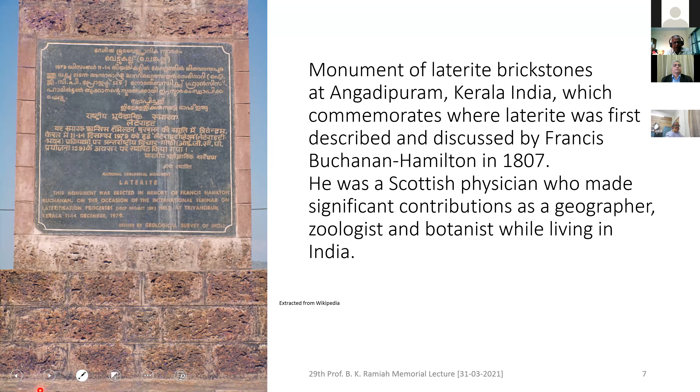In 1979, there was a geological congress, and at that time this monument was erected in his honor.

This monument is on laterites. The laterites, as I said, are available in most parts of coastal areas.

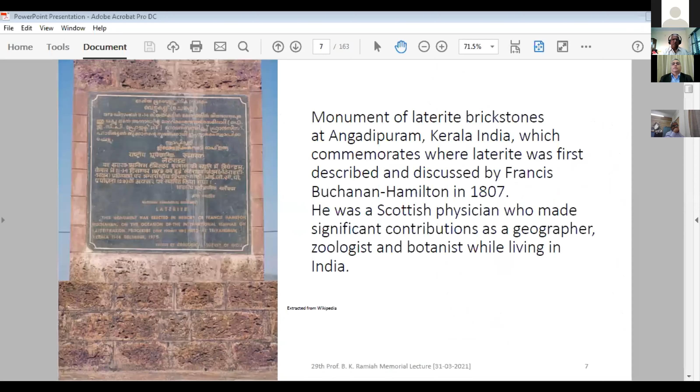So laterites are... this is the monument that was built in his honor, Mr. Buchanan. Next one, please.

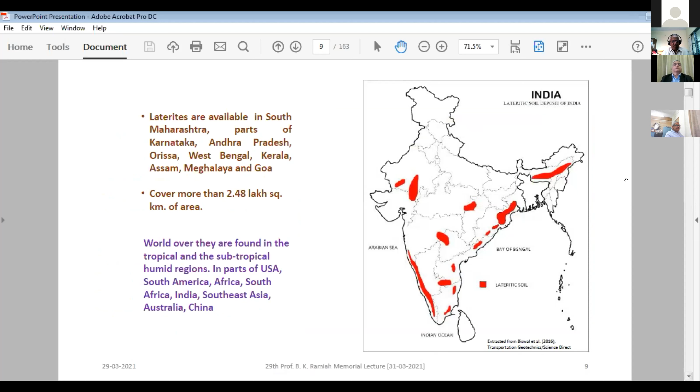Laterites, can you make it bigger? Their properties depend upon the climate.

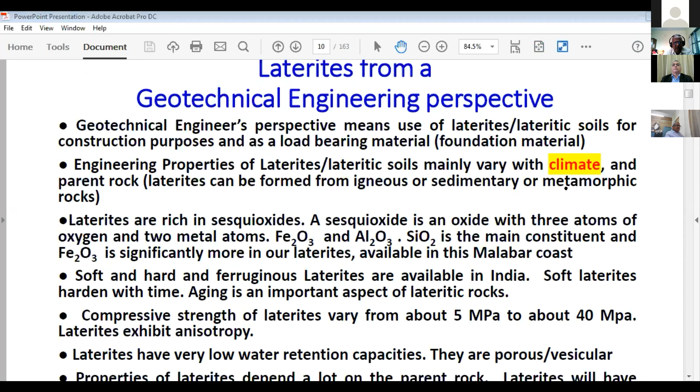There seems to be some problem with the net at my side, perhaps. So it depends on the climate and the parent rock, and they are available from soft to hard, and the strength varies from 5 to 40 megapascals. And although we get plenty of rainfall in this area, about 4,000 millimeters of rainfall.

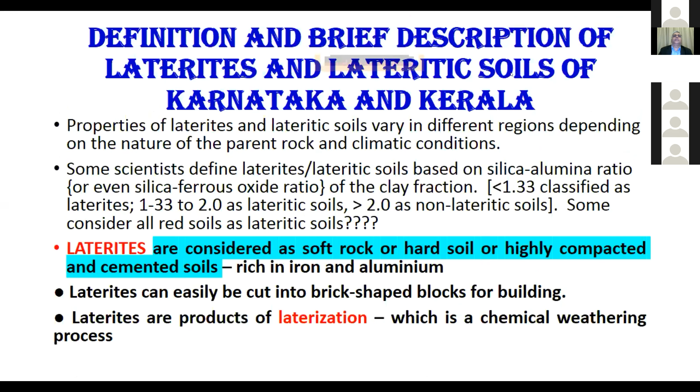Laterites are spread out all over the coastal areas, east and west coast, and some parts of northeast India.

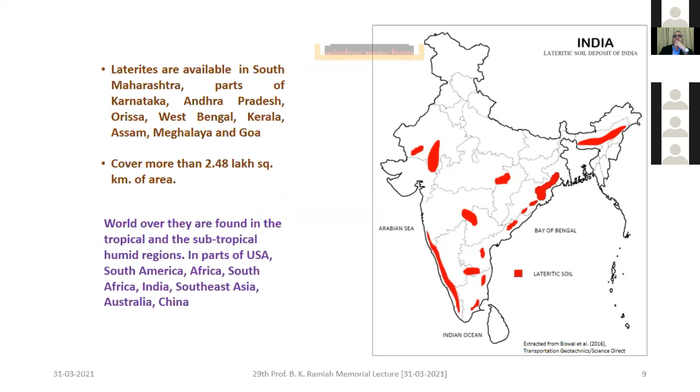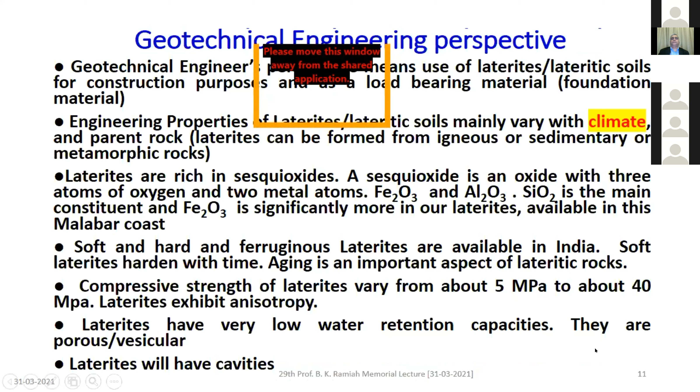Although this area receives very heavy rainfall, we still have a water problem because this laterite doesn't have water retention. It's very porous and vesicular, and it has a lot of cavities. You will see some cavities in lateritic soils, and in this area there are lots of cave temples in laterites.

I would like to talk a little bit about the geology of the area and the climate. The climate here has only two seasons, rainy and summer, and there is no winter. This is very conducive for the formation of laterites. This area doesn't have much clay, unlike other countries.

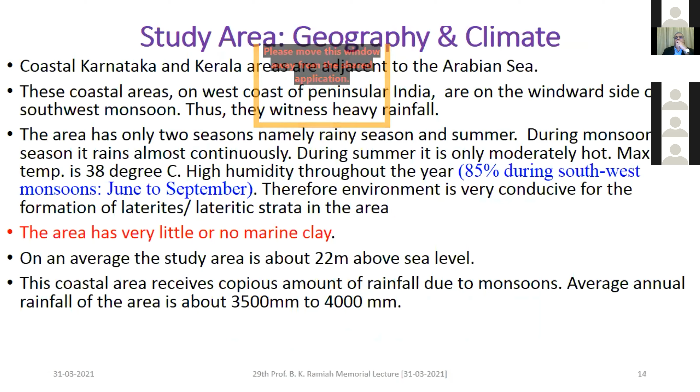We know the tectonic movements. This was one piece of land, the Gondwana land of Pangea. We know there were tectonic movements, and this is the present day. The Indian plate is moving towards the Asian plate, and in the process the Himalayas is formed.

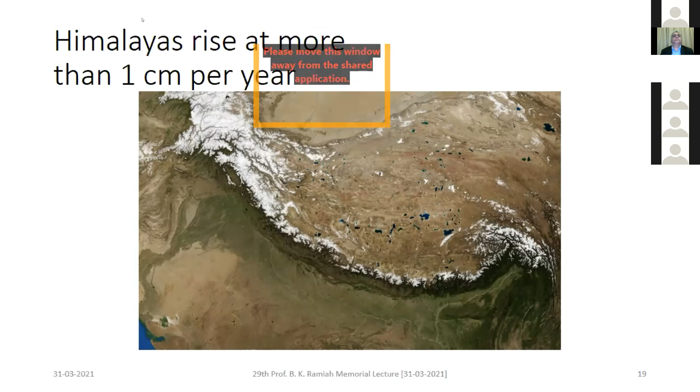So there is this Indian plateau. The plateau is also rising. Although we have sea level rise, the land rise due to tectonic movements is more, and so we don't have any sea level rise, although there is sea level rise of 1 centimeter per year due to global warming.

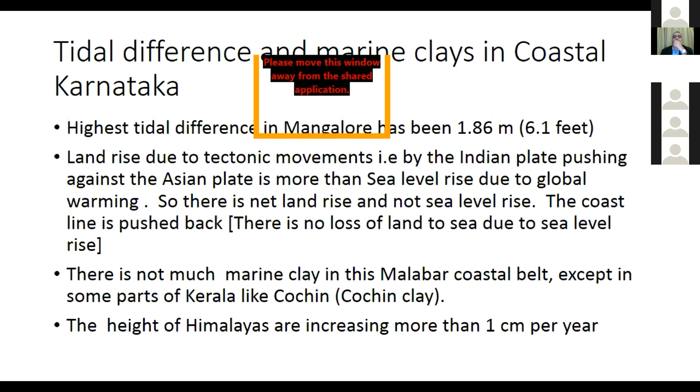We were doing some geotechnical investigations in the central part of Mangalore, and we found at 15 meters depth this core sample which had a lot of pebbles, other fossils, and peaty matter, which indicates that this land was under the sea sometime, and now the sea has moved away.

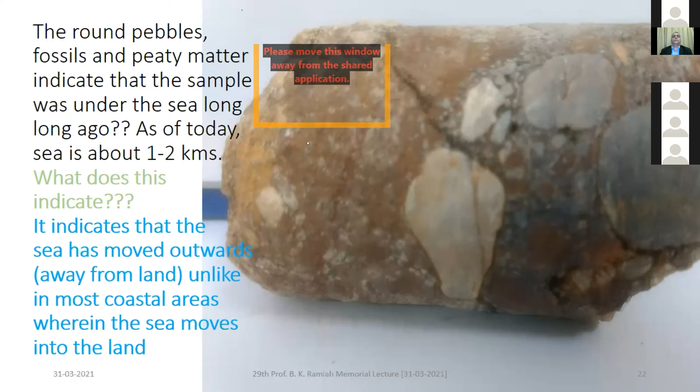This shows that although there is sea level rise, the land rise is more due to tectonic movements, and so we call our Malabar coast as the coastline of emergence, whereas in the northern Konkan coast there is a net sea level rise. So all this has a conducive geological situation for formation of laterites.

As I was telling, if there is more lithomarge, then we call it lateritic lithomarge, and while scooping, if we have more laterite, we call it lithomargic laterite. So both of these are lateritic soils, including lithomargic clay and crushed laterite.

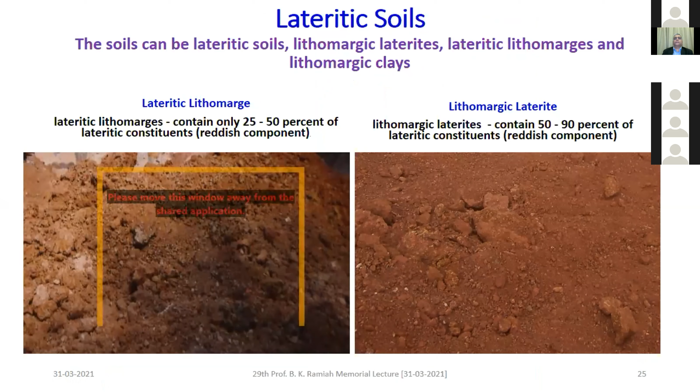Laterization is a chemical weathering process in which the silica is removed, and this laterite, as I said, is used for construction purpose. The laterites are used for embankments and low-lying areas.

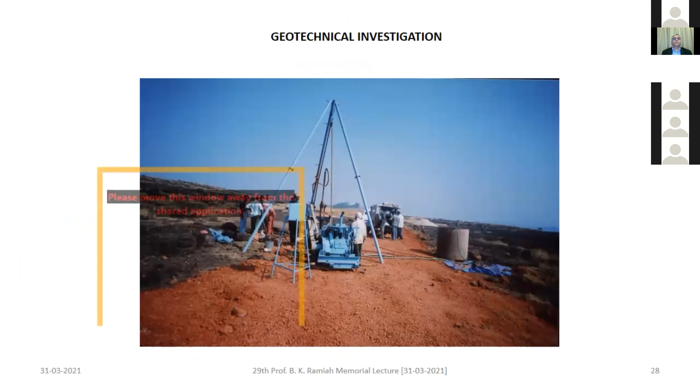It's very important to do a thorough geotechnical investigation. This is a scene of the Mangalore airport, where the Mangalore airport was built.

In one of our geotechnical investigations, the laborer was hitting the bottom of the excavation with a pickaxe, and he heard a hollow sound. When the engineer got suspicious, he asked them to dig out more, and they found that right underneath one of the columns already constructed, there was a huge hollow cavity there. So a thorough geotechnical investigation is very important in lateritic formations.

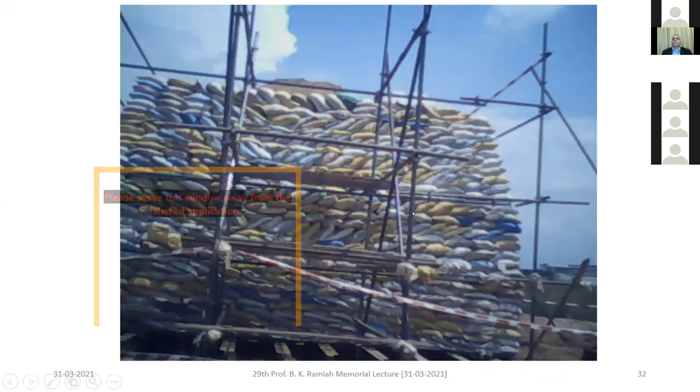So we do some load tests.

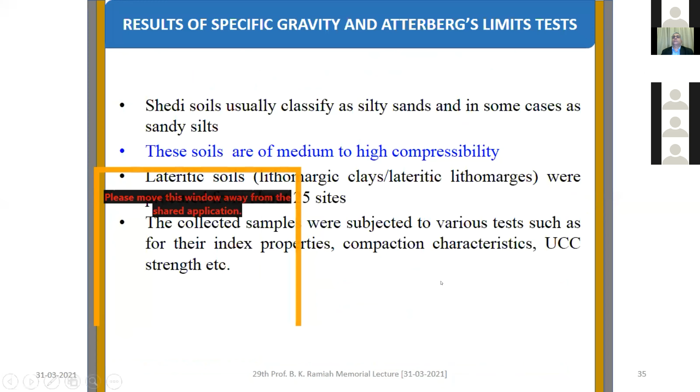So we did a number of tests on lateritic soils from about 15 sites, and the data I have compiled. Of course, there are many more. You can skip the next 2-3 slides, the tabular columns.

So in summary, the lateritic soils are medium compressible. They have a plasticity index of about 10 to 25, and a cohesion of about 20 to 30 kPa and friction angle of 10 to 20 degrees. But the most important thing is that these soils are problematic soils. They behave like dispersive soils and have a high erosion potential.

So the chemical composition is this. The laterites have a lot of silica and iron oxide, and the leached out lithomargic clay - the silica has been leached out. So the lithomargic clay has about 76% silica and a lot of alumina.

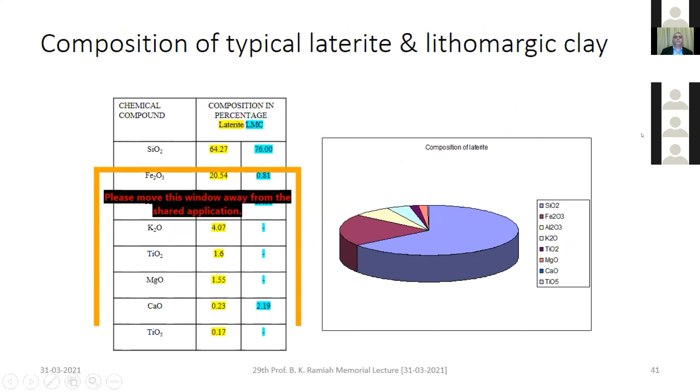So we did some UU triaxial shear tests and tried to find out the shear parameters with moisture. The shear strength parameters are very sensitive to moisture variation, so at high moisture contents, the C and phi values are very low.

We also did some plate load tests, laboratory scale plate load tests, and it is seen that the fully saturated or submerged soil has very low strength. So it's very important to control the moisture content and also give confinement to the lateritic soils.

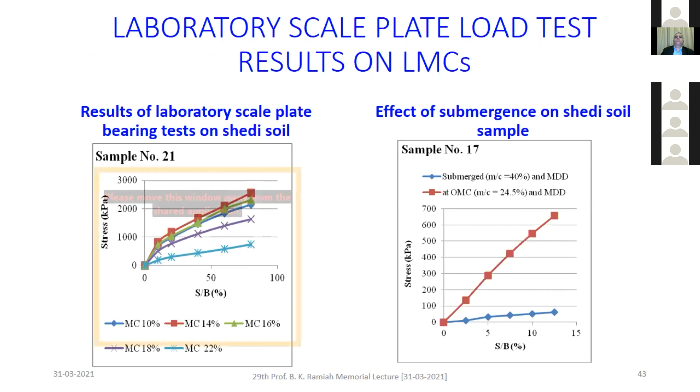I would just like to quickly run through some of the geotechnical practices and problems with the use of lateritic soils.

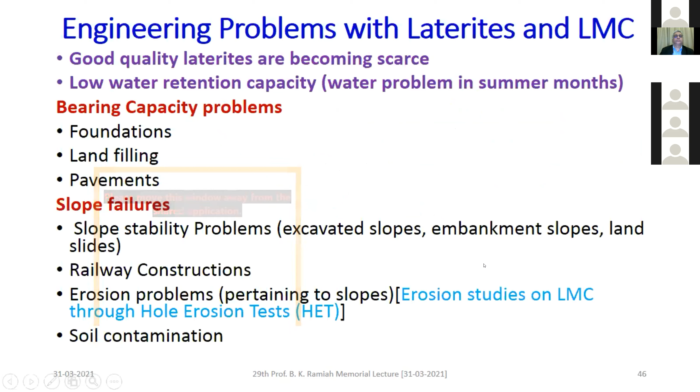So as I said, the top crust is laterite, and if you're going for a shallow foundation for lightly loaded structures, it's better not to go very deep, because as you go deeper, the strength reduces. The lateritic crust is strong, it acts like a raft, but when you cross that lateritic crust into the lithomargic clay, it's very weak. So it's better to keep the depth of foundation between 1 to 1.5 meters.

And as I said, the low-lying areas adjacent to water bodies are filled up with lateritic soils. And in such cases, it's recommended to go for pile foundations.

So landfills - many of the low-lying areas are filled up with lateritic soil. The major project is the Mangalore Airport. As you know, Mangalore Airport is a tabletop airport, and it's a very critical airport. There were a number of hillocks, and between the hillocks, the lateritic soil was filled up, and the depth of filling was about 20 to 30 meters.

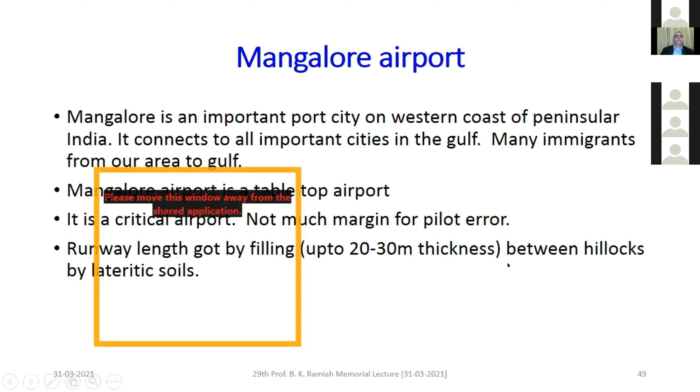So you will see a panoramic view of the filled up valley between the hillocks from the top of the fill. This changed the drainage pattern of the area, but the important thing is that you have to use good lateritic soil, not the lithomargic clay. So many highway, railway, all projects, even some in the midst of the city, the land filling is done.

Adjacent to water bodies - even in a very big refinery, the top laterite is removed, and what we have is the lithomargic clay, and many of the storage tanks will have to be supported on lithomargic clay. So there have been some failures and some geotechnical problems.

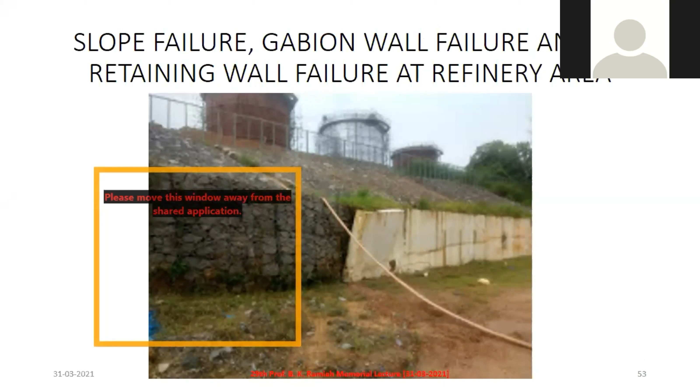In the Mangalore Airport, the new runway had used lateritic soil subgrade, and it was very well compacted, and it's been performing well for the last 8-10 years.

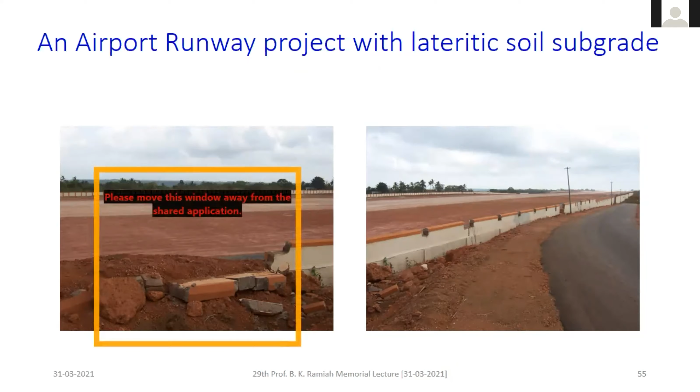Even the main geotechnical problem in this area is the slope stability of embankment slopes and also excavated slopes. This is again the Mangalore Airport, where although there was good lateritic soil used, in some patches there were lithomargic clay. And during monsoons, it gets fully saturated and the shear strength reduced, and there were some local failures.

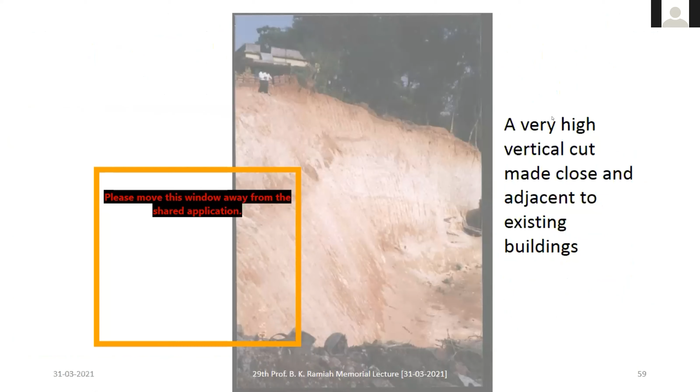So there are huge excavations, very steep and high excavations, and there's been no geotechnical application here.

Again, the main problem is having engineered slopes and then controlling the drainage. So this is what happens when it's not done. There were failures after construction.

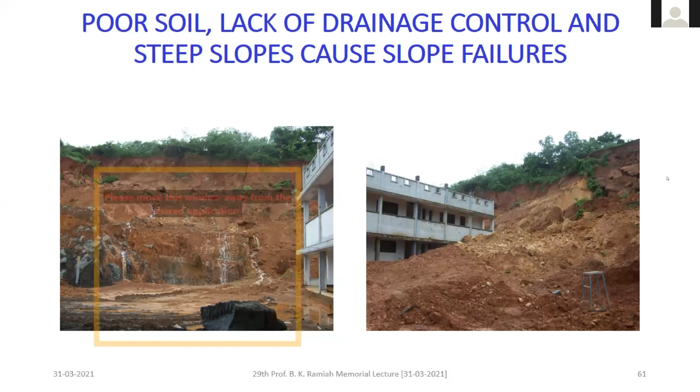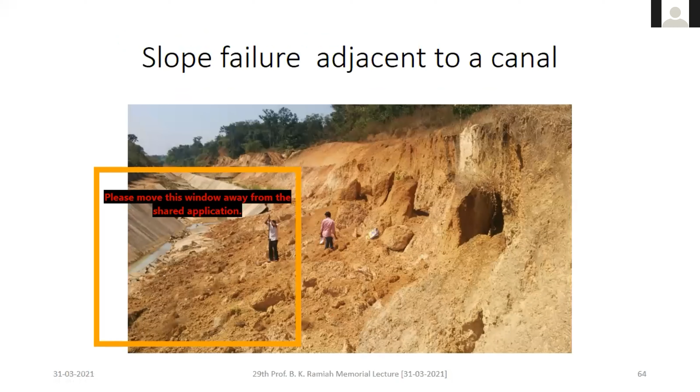There have been erosion failures because the soil is highly dispersive and erosive in nature.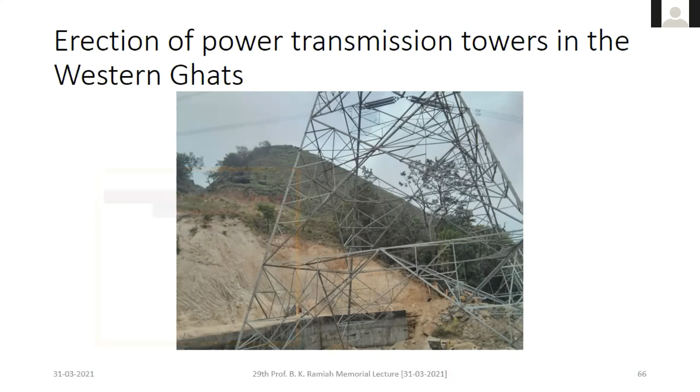Why it's important is I was told by the electricity board that if there is any problem or disruption of power, even for 1 hour, every 1 hour disruption will cost crores of rupees. So it's very important to maintain such infrastructure.

Another important project in this area is the Konkan Railway. Earlier this was a railway track, just a small mound with plenty of vegetation, and the rain would fall and flow over it. But now since the excavation is made, the water flows through the soil and also beneath the railway track.

In the initial stages, when the trains would go, there would be mud pumping and the trains were asked to crawl. Usual speed is about 120 kilometers per hour, but they were asked to crawl at 10 to 20 kilometers per hour.

But later, luckily, at this place, the rock was at shallow depth, 5 to 8 meters. So some stretch of the track was supported on piles, and now it's performing well and the trains are moving at their normal speed.

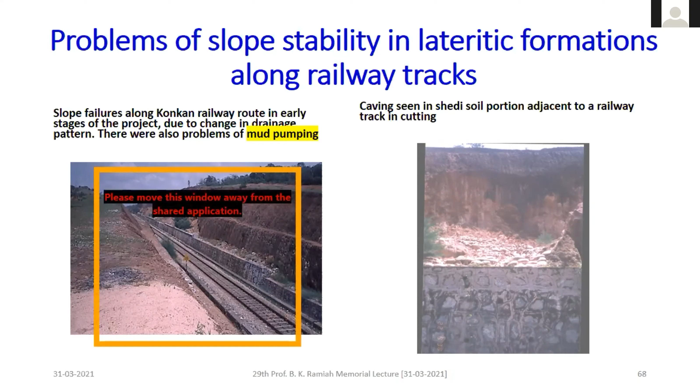There have been a lot of failures on the canals due to erosion.

What is required is an engineered slope with berms, typical slope height of 6 meters, berms at 1 to 2 meters, and drains such as bench drains, chute drains, and collection sumps, along with surface protection measures like stone pitching, turfing, or geosynthetics.

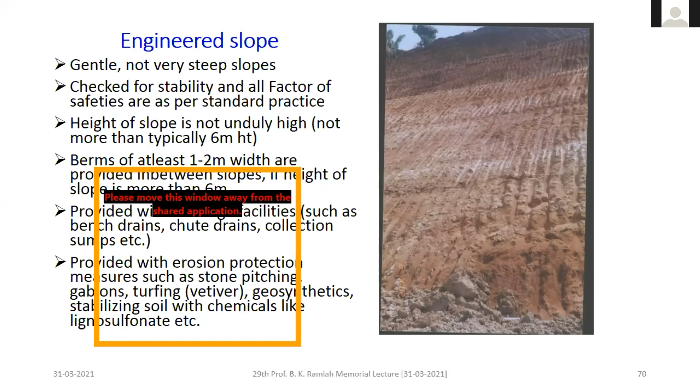Gabion walls are used, and also turfing is used. Vetiver grass has been recommended, so we did a lot of studies on vetiver grass in this area.

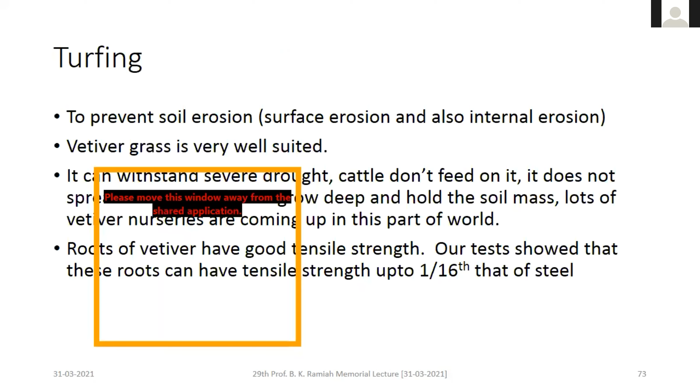There were also a number of railway projects with high embankments, and they wanted underpasses. So to have these underpasses, either there is a push box technology or the cut and cover method.

In some cases, the railways adopted the push box technology because they didn't want the trains to be stopped even for a day, so the boxes were pushed. It's similar to what we have in the Indian Institute of Science.

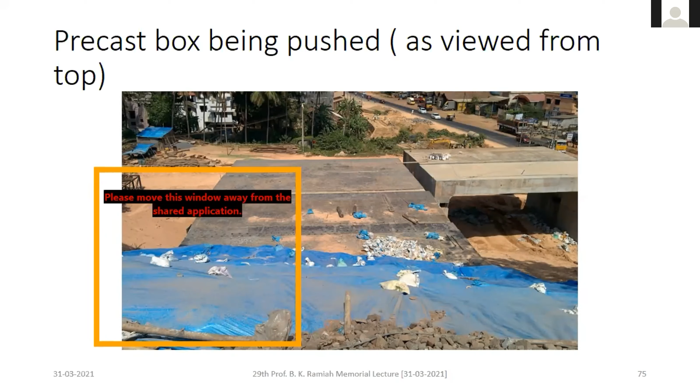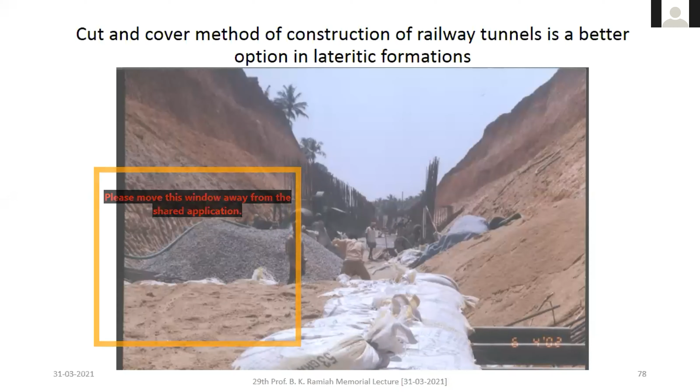The other option is cut and cover, which was adopted in some stretches in Kasaragod because this was a new track being laid. So the cut was made, the tunnel was made, and it was covered.

We have a similar underpass in our campus, which connects the eastern part and western part of the campus, and we had adopted this cut and cover technology.

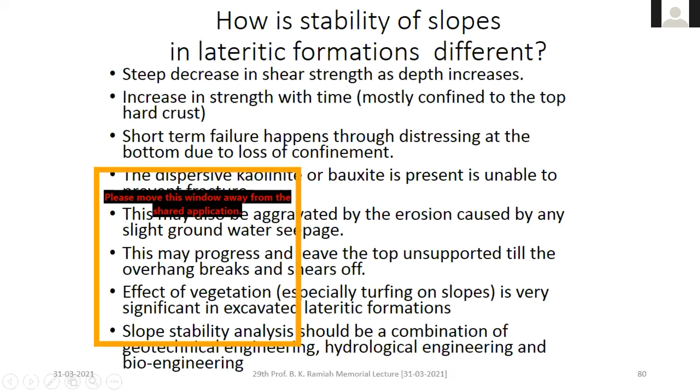Slope stability in lateritic formations is different because the soil is not homogeneous or zoned. The strength of the soil decreases with depth, and in the lithomargic clay zone, especially in excavated slopes, there is loss of confinement and low shear strength, and sometimes vegetation. There's plenty of rainfall. So slope stability should be a combination of geotechnical engineering, hydrological engineering, and bioengineering.

In many places there is vegetation on the slopes, and vetiver grass is being used now extensively. So we made a small study just to qualitatively see the improvement.

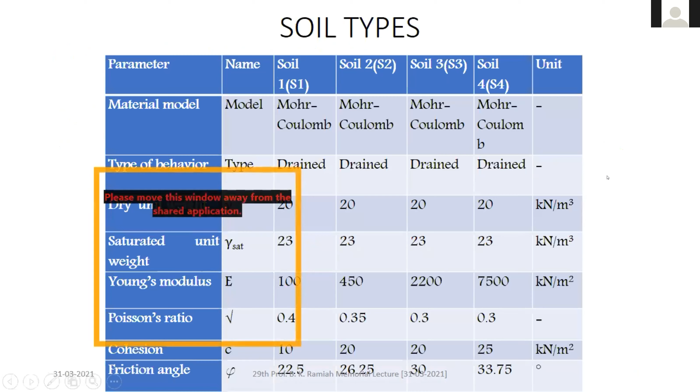We did some tensile strength tests on the vetiver root and found it has very high tensile strength, almost 1/6 of steel. We also did direct shear tests with vetiver roots put in place and found that the cohesion is increased, with an apparent cohesion increase of about 30%, but the angle of friction does not change much. So between root-free soil and rooted soil, the angle of friction is the same, but the cohesion is increased.

We also did some studies with trees. The previous one was turfing with grass. With trees, sometimes a tree on top or in the middle of the slope is not good because it adds to instability, but a tree at the toe of the slope will add to the stability.

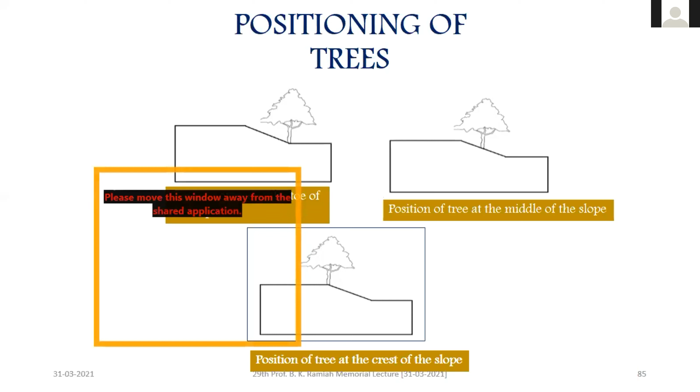We also simulated ponding at the top. So these are some of the results: a bare slope would give about 1.2, but a turfed slope with a tree at the toe would give almost 2.1. That's a considerable improvement in the factor of safety.

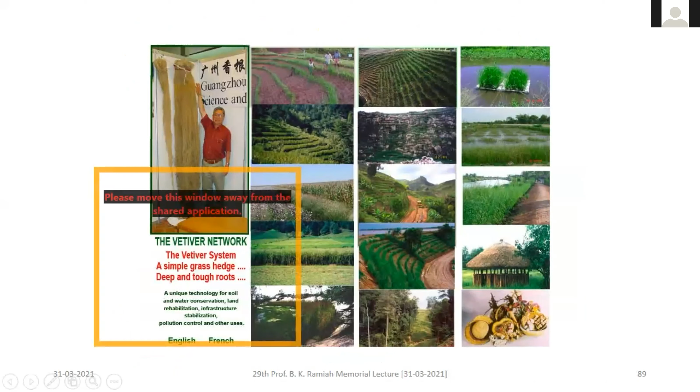Most of you may know that vetiver grass is a very special type of grass. It grows about 3 meters, and in Kannada it's called lavancha. Cattle will not feed on it, and it can withstand drought. So it's a natural geosynthetic, and the roots get entwined, mostly to prevent surface erosion.

We recommended this on some slopes in the Konkan Railway, especially at a place near Hatti Angadi, and the slopes are really stabilized.

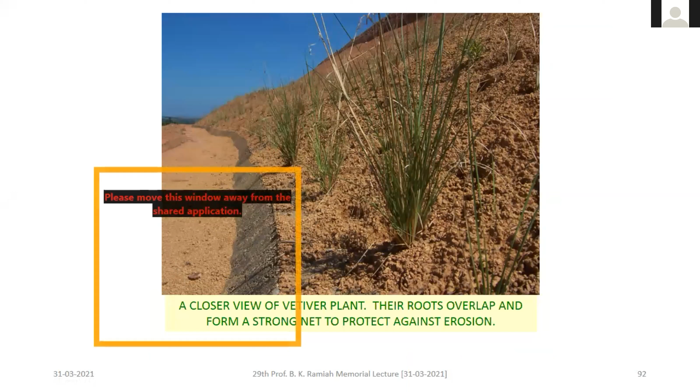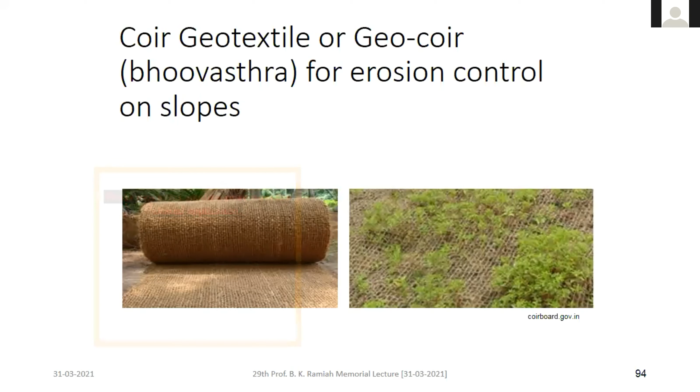You can also have some sort of natural geosynthetic like geocoir or geojute to add improvement in preventing erosion. Erosion can also be prevented by having some sort of geosynthetic. In the case of flyovers, where we have precast units and reinforcement, the joints can have geotextile to prevent erosion loss.

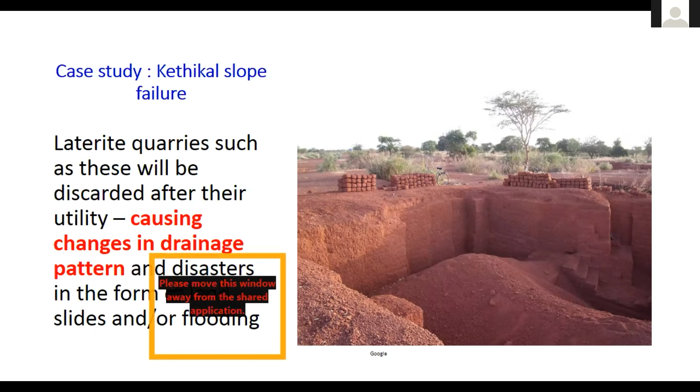This is an interesting case study that happened some years back, called Kethikal. It's a small hillock, and the top has very good laterite, so people were attracted to it and had quarries there, extracting the laterite. But these quarries were later discarded, so water would accumulate. Earlier the water would flow over the slope, but after accumulating in these discarded quarries, it would flow through the soil, reducing its shear strength. This is the typical cross section of that slope before failure.

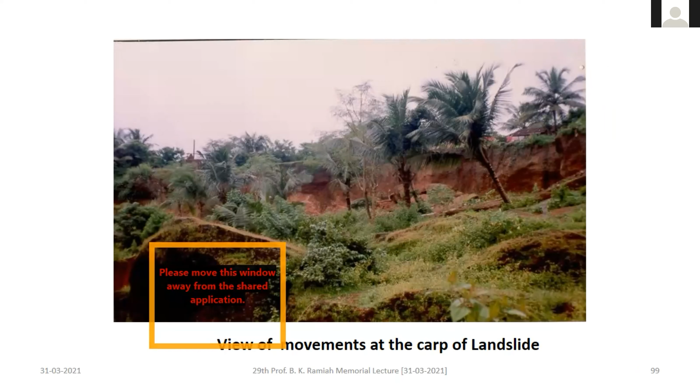This slide shows that water would accumulate—this is only a symbolic representative sketch—and water would flow through that. This is the picture after the failure. There was a huge landslide, and at the scarp it was nearly 4 or 5 meters. At the road there was a lot of heaving at the toe, and the road also sank by 3-4 meters, with the affected length about 200 meters.

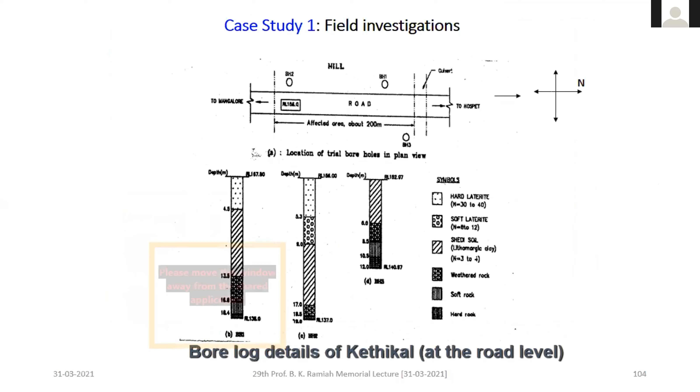The road had sunk nearly 3-4 meters, and since this was an important state highway, people could not wait, so they rectified it overnight. We did some post-mortem studies, had some boreholes, and found a lot of lithomargic clay that had gotten fully saturated, reducing the shear strength. We ran some slope stability analysis and found that the factor of safety was less than 1. This was done by one of our research students.

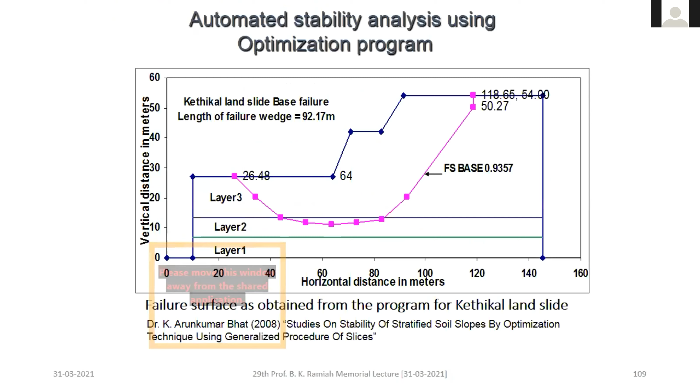As I said, the soil is very sensitive to moisture variation. We also recently published a paper in the Indian Geotechnical Journal on erosion studies. We did some erosion tests on lateritic lithomargic clay using the same model as Wan and Fell.

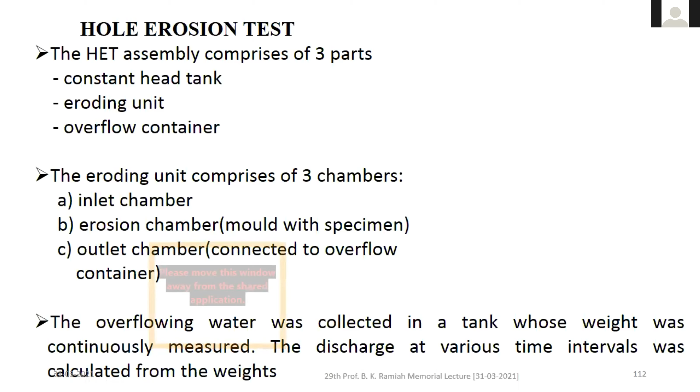It had an eroding unit, a constant head tank, and an overflow container. This is that eroding unit—the central part is where the soil is kept with a pre-drilled hole.

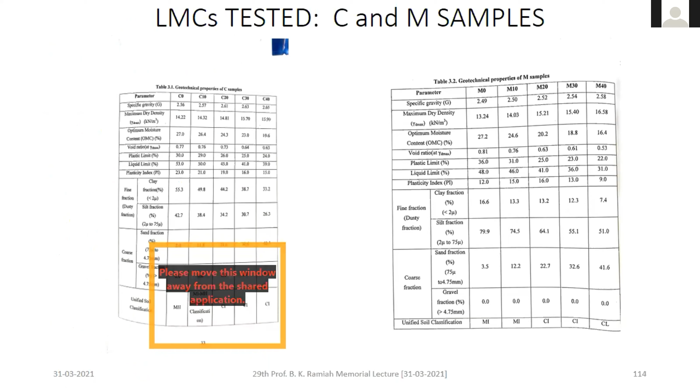We tested different soils with varying fractions of clay, silt, and sand, because we wanted to see the influence of these various fractions on erosion.

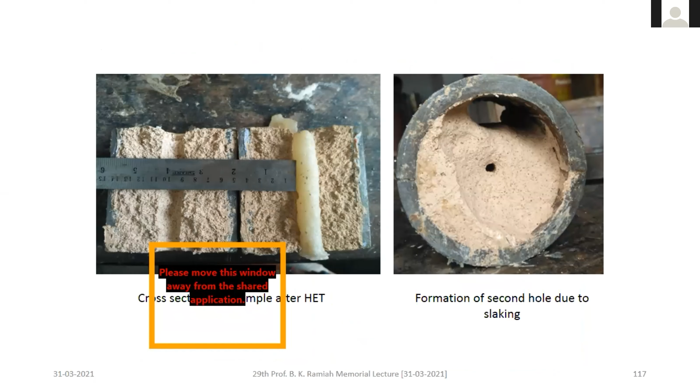We measured the quantity of water collected, the quantity of fines that were washed out, and also the final diameter. We used equations based on Wan and Fell.

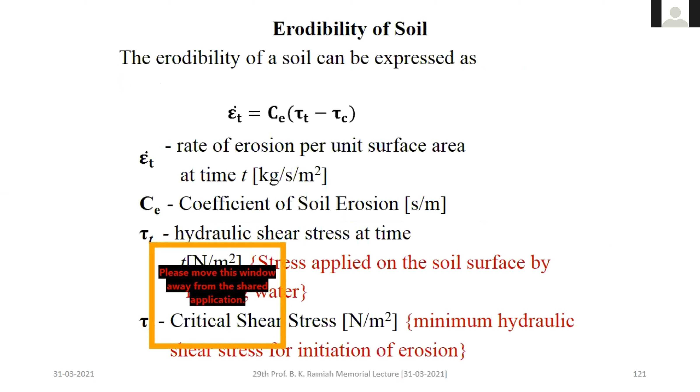We varied the molding water content and the different percentages of various fractions. This is the equation used: the erosion rate is the coefficient of erosion into the shear stress at any time, minus the critical shear stress.

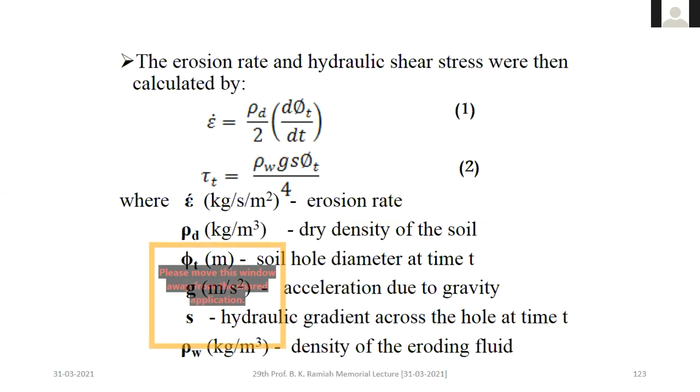So we could measure the quantity of water and the amount of fines washed out. We studied various parameters, and these are some of the other equations for the erosion rate and the critical shear stress at any time. These are the typical results.

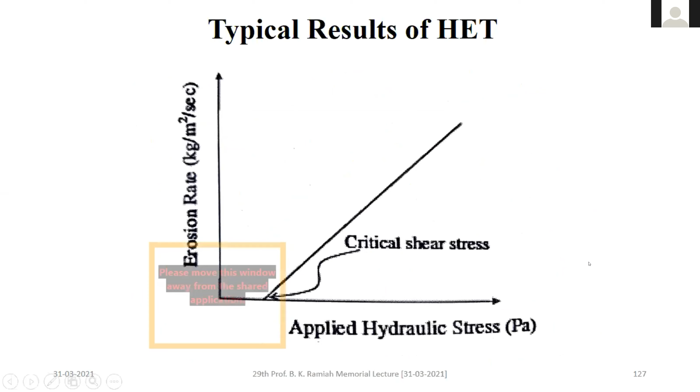I'll just talk about the most important finding. We can plot a graph of the erosion rate versus the applied shear stress, and it would look like that, and we can find out the critical shear stress - that's the minimum shear stress required to initiate erosion. The slope of this line gives the coefficient of erosion. This is a typical result we got.

There's another term called the erosion rate index, introduced by Wan and Fell. The erosion is classified depending on the erosion rate index. Lower the value, more extreme or rapid is the erosion. Higher value of IH, slower is the erosion.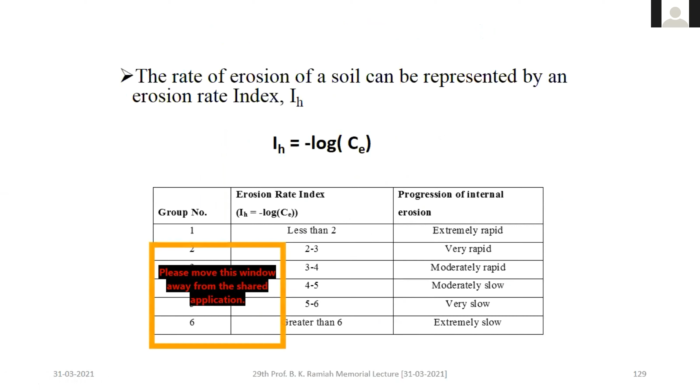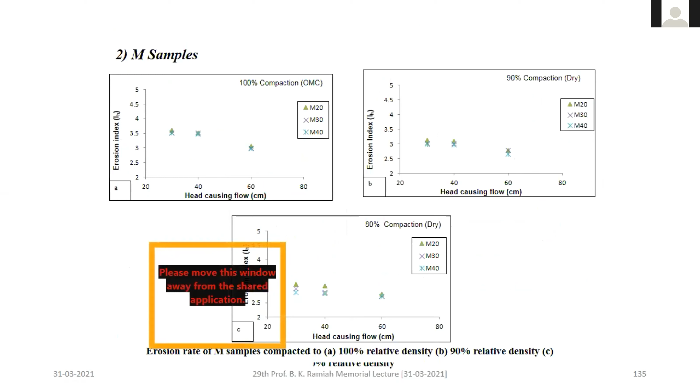We varied and studied the effect of water content - these are some of the results, I won't talk much on that. For different soils, we studied the effect of water content and compaction. Some samples had more clay content and the M samples had more silt content. We also studied the influence of hole diameter, which didn't seem to have much influence.

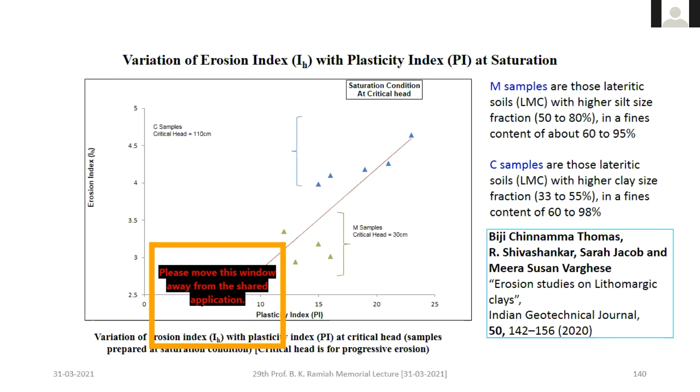We could quantify the erosion rate with the plasticity index, the plasticity characteristics. That is, higher the plasticity index, the erosion rate index is high, which means less erosion potential. This means the lithomargic clay with higher clay content was less erosive, had less erosion potential than the lithomargic clay with higher silt content.

So we could make a detailed study and relate the plasticity characteristics with the erosion characteristics.

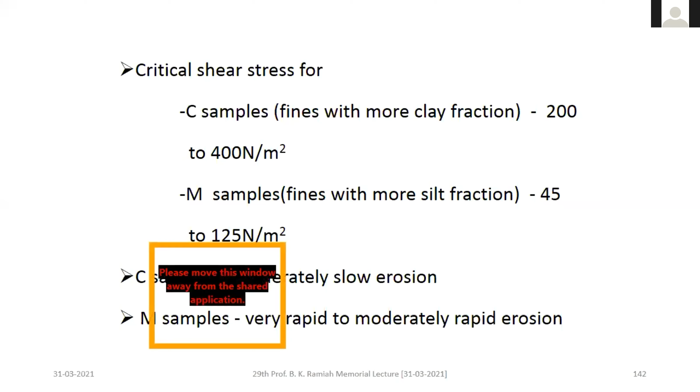We found that the lithomargic clay with higher clay content had a critical shear stress of 200 to 400 Newton per meter square, meaning it required higher shear stress to initiate erosion. But silt is more erosive - lithomargic clay with higher silt content has lower critical shear stress. We also made some studies on electrical resistivity of clays.

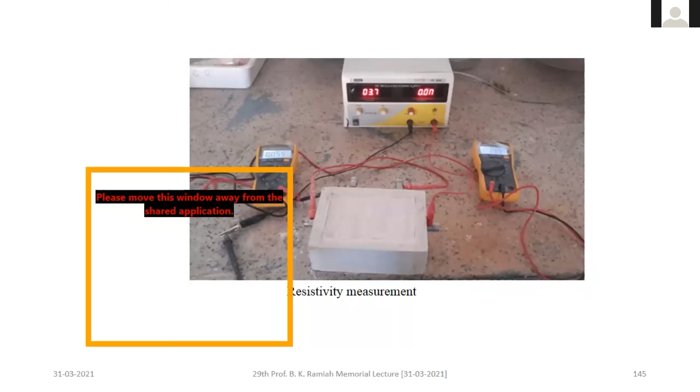This is to relate electrical resistivity with geotechnical parameters. We used an electrical resistivity box like this, and soil was put in and compacted - different types of soils with higher clay content, higher silt content, varying the different fractions and the water content.

We found this typical result showing the variation of resistivity with water content - as the water content is reduced, the resistivity increases, or in other words, the conductivity decreases. If you take a tangential intersection of the initial and later parts, with SL, PL, and LL shown as the shrinkage limit, plastic limit, and liquid limit values obtained by conventional methods, the tangential intersection very well coincided with the shrinkage limit.

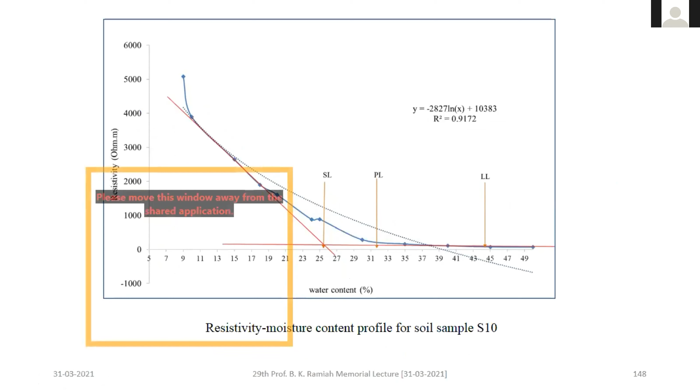This means the electrical resistivity profile can be used to predict the shrinkage limit in a faster way, because normally the shrinkage limit takes quite some time.

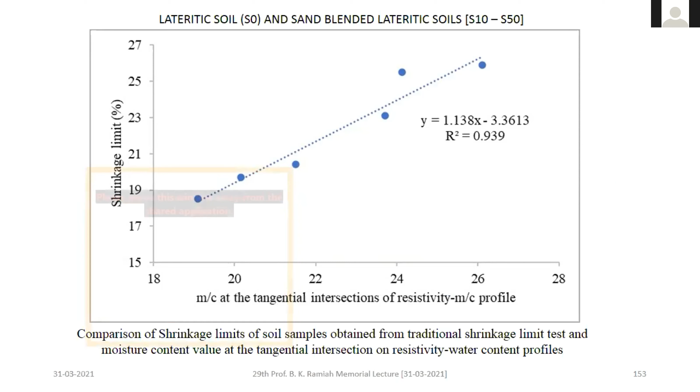These are for different blends - we blended the lithomargic clay with different percentages of sand, and this is the relationship between the shrinkage limit obtained by the conventional method and by electrical resistivity, and there was a very good correlation.

And then we also did some studies with contaminated soils to find the effect of contamination on lithomargic clays. So we contaminated with phosphoric acid, with different normalities.

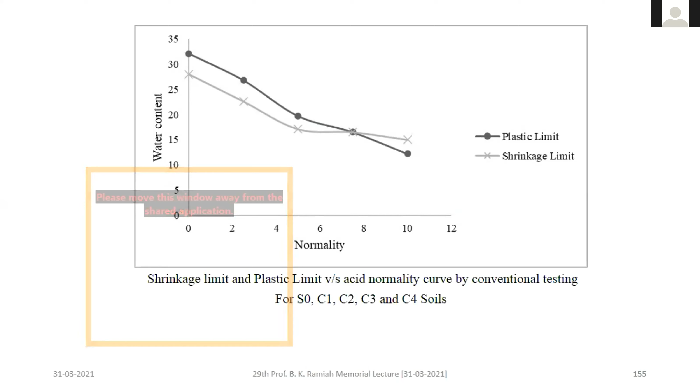We plotted the plastic limit and shrinkage limit by the conventional method, and found that at higher normality, the shrinkage limit will be more than the plastic limit. This is in contrast to what we usually know, that the shrinkage limit is the lowest limit. This is from the conventional test.

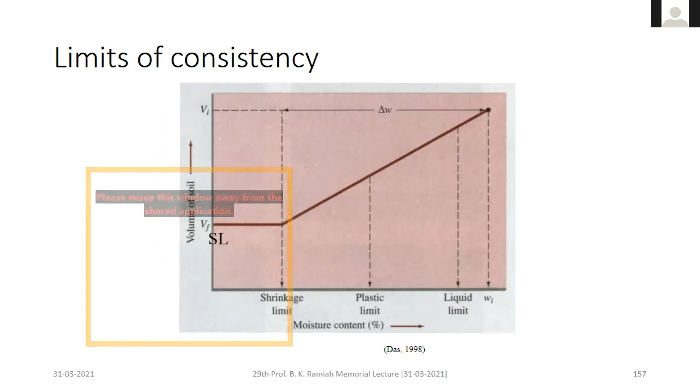From the electrical resistivity, we could get a similar result. There are a lot of studies done on this by the IISc group under Professor Sridharan and others. They say that the plasticity characteristics are affected by contamination, so contamination affects not only the strength, but also the plasticity. This is what we are used to know.

But our results seem to say that under certain circumstances, the shrinkage limit is more than the plastic limit, or in other words, the soil could be in the plastic state even at the partially saturated state. So there's a lot more study to be done on this.

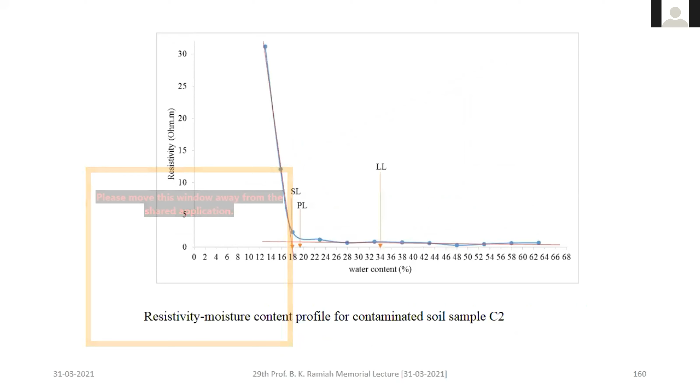So this is again the same profiles for contaminated soils, and as I said, we could get exactly the same result as in the conventional test. We could compare the shrinkage limit from standard shrinkage, the conventional test, and from the electrical resistivity profile, and there was a very good match. Even that rare thing of the shrinkage limit being more than the plastic limit was also reflected in the electrical resistivity studies.

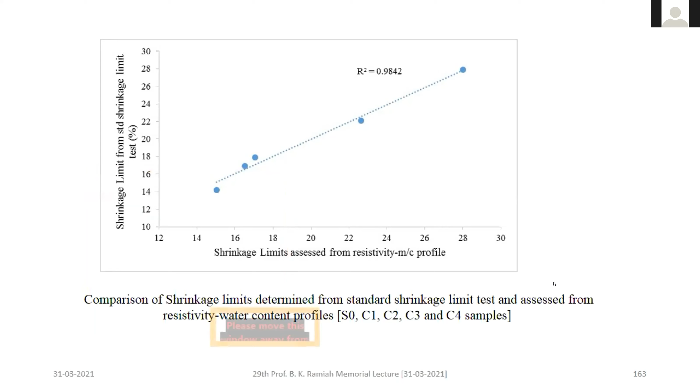So in conclusion, laterites are products of laterization, and their properties depend on the nature of the parent rock. In lateritic stratification, there are laterites: the hard one is laterite, and the broken one and the underlying lithomargic clay are the lateritic soils. So laterites can be considered as soft rock or hard soil, or highly cemented soils rich in iron and aluminum.

The lateritic soils come in different grain size compositions. That is the laterites of our area, but in some other regions, they're all fine grained soils, and they behave like dispersive soils. They're highly erosive. Our studies found that the lithomargic clays are of medium erosivity, and their properties also change with contamination. As for any other soils, for the good performance of geotechnical structures, we need good compaction and good drainage, and to follow good geotechnical practices.